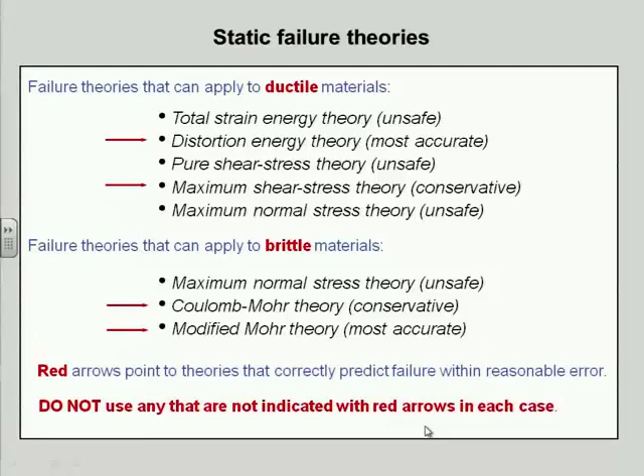Yes, Dan? So are brittle materials generally stronger in compression? Yes, that's what that's saying. In general, what Dan is asking is are brittle materials in general stronger in compression than in tension? And the answer is yes, most definitely.

In fact, cast iron, gray cast iron, which is probably the most commonly used of these kinds of materials, is 3 to 4 times stronger in compression than in tension. Concrete's another example, which has very poor tensile strength and very great compressive strength. I don't know what the ratio is.

Concrete is obviously not a metal, and it's a material that I'm not sure we would dare characterize as homogeneous and isotropic if it has rebar in it, which most applications do. Then it's going to have very different strengths in different directions, right? Concrete without the rebar would be approximately homogeneous and isotropic, I would think.

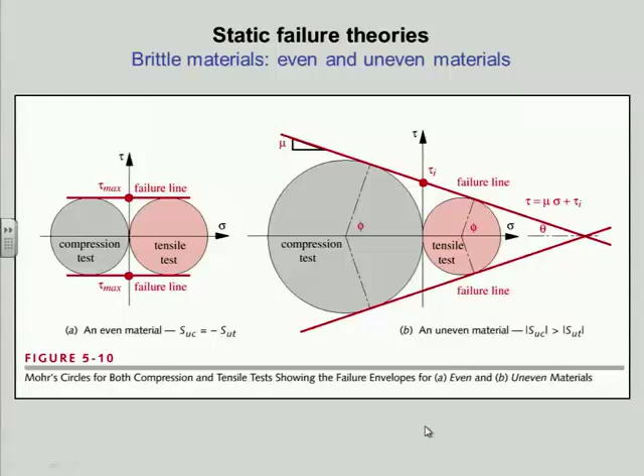So that's kind of getting off topic. Back to failure theories.

Wrought metals do obey Hooke's law; cast metals don't necessarily. So we have to fake it with an approximate value for Young's modulus, shown on this offset line, by going over 0.2% in strain and then drawing a line parallel to the starting slope, finding the intercept and declaring that the yield point—because there's no distinct yield point, unlike ductile materials that really give and show you that little hump as it starts to go into the plastic zone.

This doesn't really have much of a plastic zone. The plastic zone, such as it is between Y and F, is fracture. So brittle materials just suddenly break, as opposed to giving some warning, as with our specimen over here for the ductile steel tensile test. You can see the necking down that occurred as it went beyond the yield point and on the way to the fracture point. So you have visual warning that it's going, if you happen to be looking in the right place at the right time, and you can run, right?

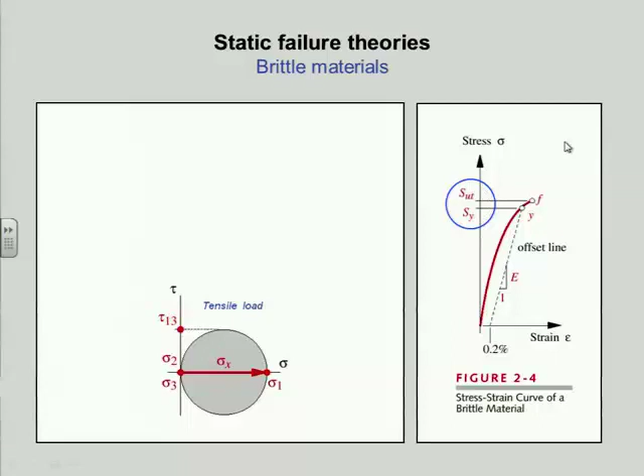So the tensile stress diagram, Mohr's circle for the tensile test in the brittle material, looks just like the one for the ductile material, but the material is behaving in a different way. Notice how close the ultimate tensile strength is to the yield strength, which isn't true of soft ductile steels—there's quite a difference between those two numbers, maybe 30,000 to 50,000 psi for a 1020 steel or something like that.

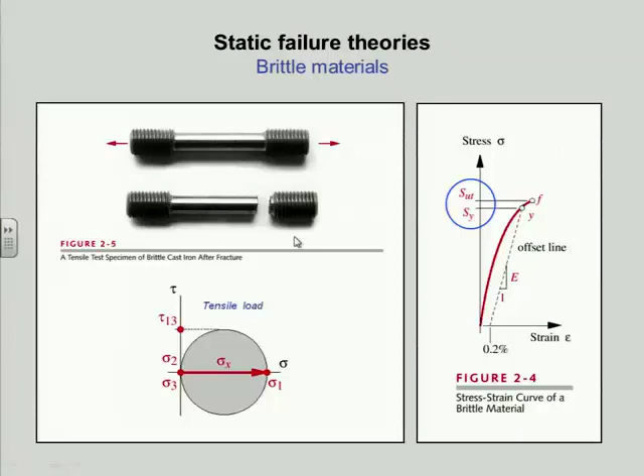There's the same picture of the specimen I just showed you on the board, with a before and after being pulled. That's cast iron—gray cast iron.

Another word on materials, which it's critical you understand well to be a design engineer, because you've got to make it out of something. There is cast iron, and there's cast iron. When you just see the term cast iron, that usually implies what's properly called gray cast iron—the stuff used for making machine bases and things like that. It's very weak in tension, about 20,000 psi tensile strength, with good compressive strength. Not generally used for machine parts that are loaded dynamically.

But I can go to a better grade of cast iron called cast ductile iron. That's made by a slightly different process, has different chemical composition, and has significant tensile strength up to about 100,000 psi. On the other hand, wrought steel can go as high as 300,000 psi in tensile strength with appropriate treatment. So there's still a big gap between wrought, really strong, and cast, not so strong.

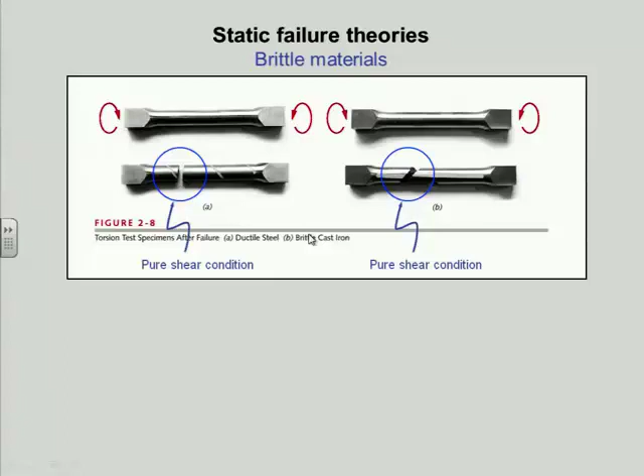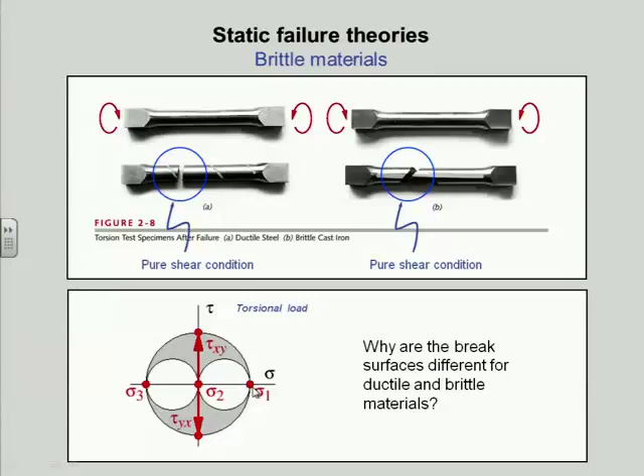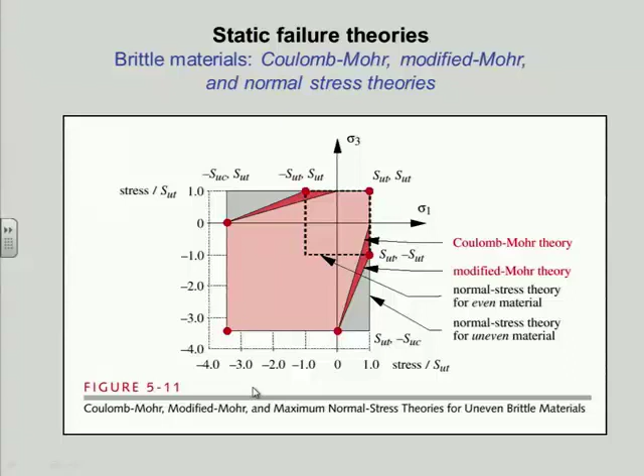The Coulomb-Mohr theory is next—it's the right top corner of the normal stress, but then a line drawn from the sigma 1 axis intercept down to this intercept, and it's the light pink. And the modified Mohr includes the darker pink. So why do we get these lines? Where do they come from?

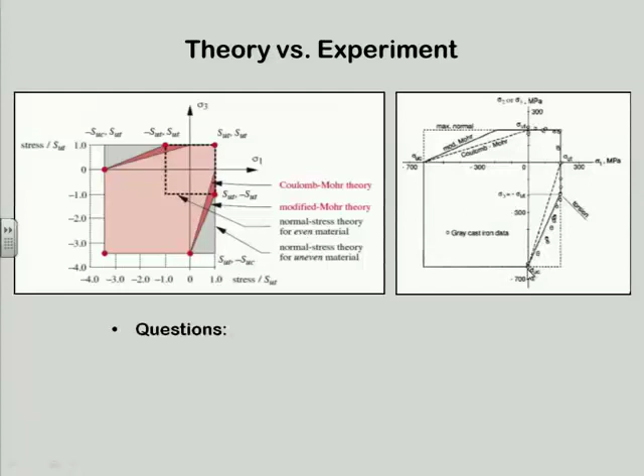So I think I've answered these questions already in my discussion. You tell me, based on what I just told you, which theory best fits the experimental data?

All together now. Got it. Conservative is Coulomb-Mohr, and lousy is normal stress theory. Don't use it, because some of your stuff is going to break, and you will think it doesn't.

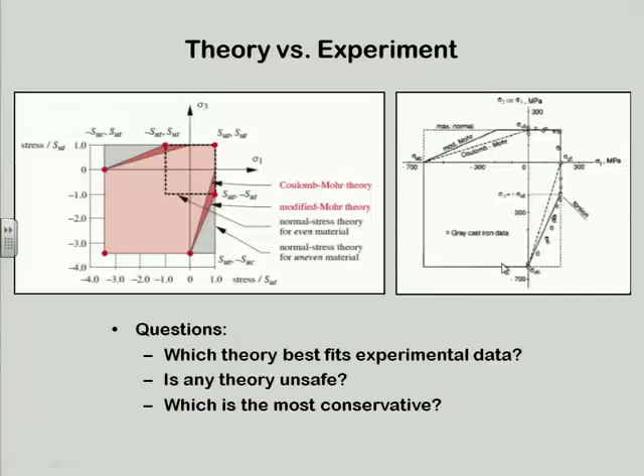Now, these, of course, are actual fractures, so we would not go that close to it. We would put in a safety factor, which gives us an envelope inside of that, of the same shape, by whatever comfort margin you want, factor of 2, 1.5, whatever you like. Same picture.

Notice this little line says torsion. Well, torsion will be equal positive and negative normal stresses, right? Because the Mohr's circle is centered at the origin. Shear plus and minus. I get equal plus and minus normal. So any torsion case is on a 45-degree line, either there or there, depending on directions.

So that's the modified Mohr boundary as labeled. And that just reinforces what the previous slide said.

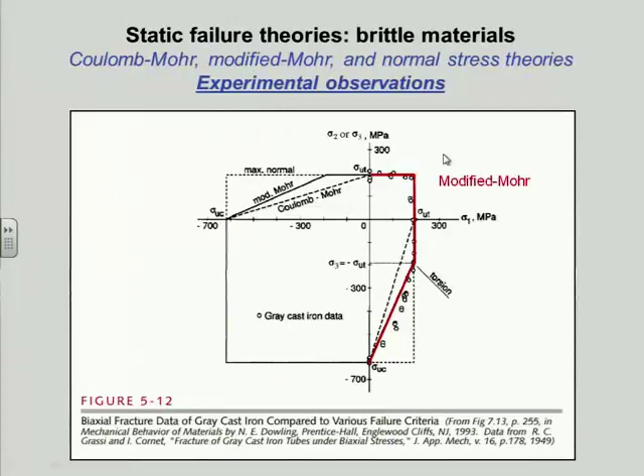They're always ordered algebraically, largest to smallest, and sigma 2 is going to be 0, and I'm only looking at sigma 1 and sigma 3, so I don't have to plot sigma 2 at all. So this is sufficient to satisfy all cases that I'll encounter.

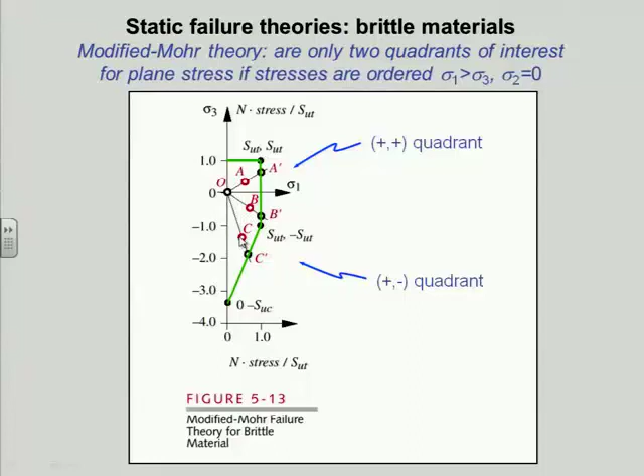If sigma 3's absolute value is larger than sigma 1, I break out of this line. I have to write the equations for these lines to get the safety factors. If I'm in zone 1, it's very simple: safety factor, often called N, is simply the ultimate tensile strength divided by my largest principal normal stress, sigma 1. This is quite simple to use, provided I get the right numbers in it.

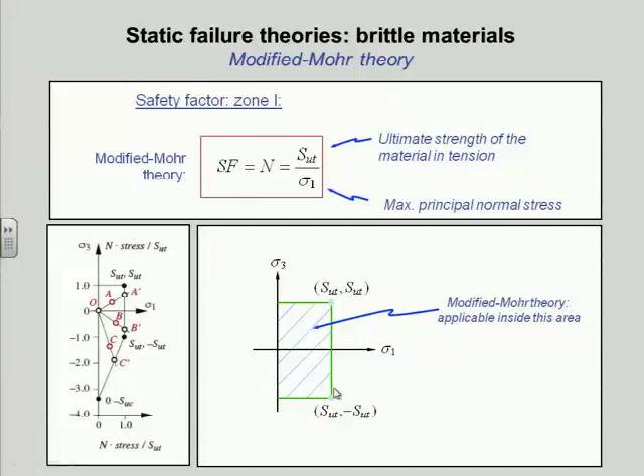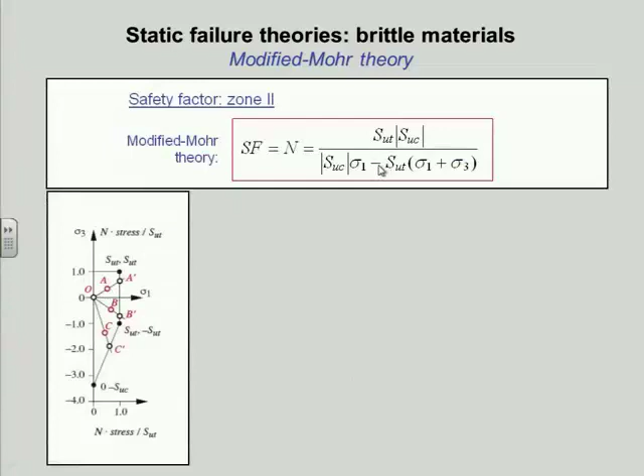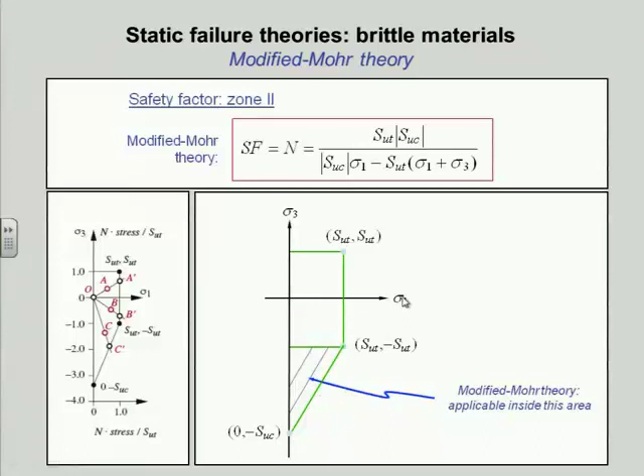That's my case 1, or zone 1, where my sigma 3's absolute value is not larger than my sigma 1. If I'm in zone 2, the south part of that piece, I have a more complicated formula. These come out of equations for those lines, and I derived those in the book so you can see where that equation comes from. So now I'm down at either B or C. Actually, I'm down at C in this case, below here, and I'm going to come out on this angle line.

So you need to understand the difference between these cases so you go after the right formula. It's based on the relative values of your sigma 1 and sigma 3, as well as their signs.

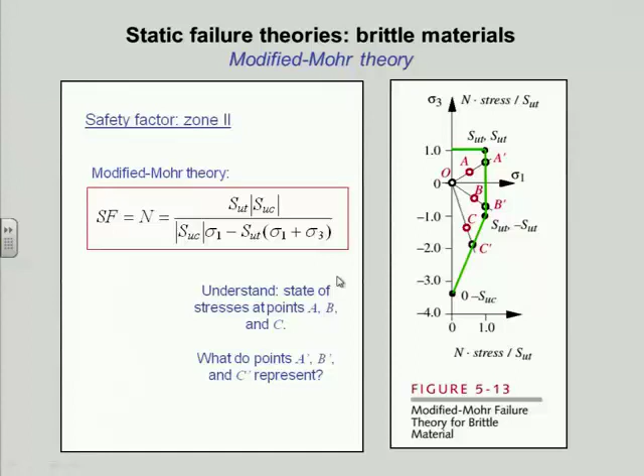Now, we have this very neat concept in the ductile theory called von Mises, or von Mises-Hencky, or Charlie's, or Harry's, or Sam's, whichever name you want to take, from all its inventors. That's a very nice way to wrap everything up with a ribbon. I've got some kind of crazy stress state, I can calculate the principal stresses for that. Now I can take the principals, put them through the meat grinder, and come up with a von Mises, and compare that directly to my tensile test specimen number and say whether I'm safe or not.

That's very convenient. So we didn't have, until recently, an analogous situation for the brittle case, until Norm Dowling of Virginia Tech, who has an excellent book on this topic from the materials side. He's a materials prof at Virginia Tech, and I referenced a lot of stuff from his book in here with permission. I think those pictures I was showing you are out of his book. He came up with this interesting concept.

He creates these factors, calling them C1, C2, and C3, which are functions of the stresses that you happen to have. This works now for 3D, because I've got all three of them in here. C1 involves sigma 1 and 2, C2 involves 2 and 3, and C3 involves 1 and 3. So you've got all your bases covered for a three-dimensional stress state. And you have the ultimate tensile and the ultimate compressive strength of your uneven material.

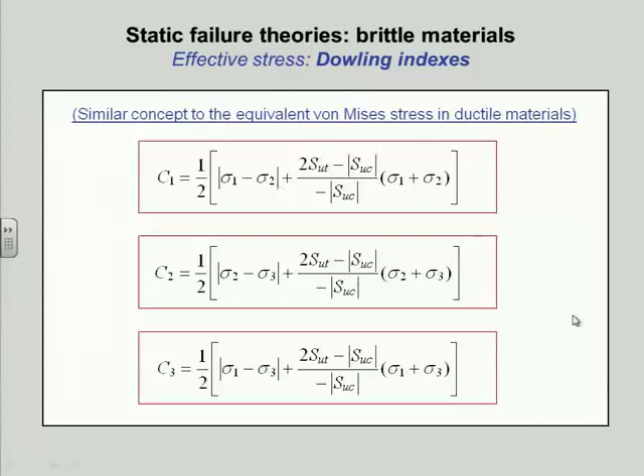So I can calculate those based on my particular set of principal stresses and my material strengths, and I can then apply those. I think he gave it this little symbol, the cedilla — does that sound right? A little squiggly over the letter. I'll call it a cedilla, I don't know any better. So sigma cedilla here is what I'm calling Dowling's effective stress. He doesn't call it that, but I do.

Dowling's effective stress, analogous to von Mises, with this funny symbol over it, is found by taking the largest value of all 6 of these parameters. You already have 3 of them, sigma 1, 2, and 3, that you calculated, and you use his equations to get the other 3, C1, C2, C3. The biggest one of those is this sigma squiggle, and I divide that into SUT, and I have a safety factor.

So this I can computerize. In my program, I can simply set these equations up, have it calculate all 6 of them, use a max function to find the largest one, grab that number, divide it by SUT, and there's my safety factor. Very convenient. If the max comes out less than 0, in other words everything's compressive, then you set it to 0.

I'm going to change topics completely, so I want to pause here and see if you have any questions on what I've just put forth. Yes? But if it's 0, then it won't be... what's infinity? Will the safety factor be infinite? Yeah. So if it's not compressive, then we don't worry.

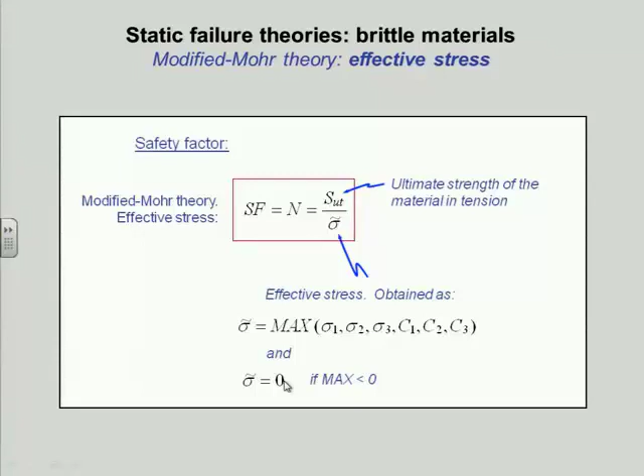There's several ways I can do that, and they're very effective. So tensile and shear are our enemy. They work together, depending on the material type, to destroy the part in some fashion. Any other questions on this?

Okay, new slide, literally. Very interesting topic called fracture mechanics. I'll set this up with some history, which I think is quite interesting.

First, the intro says that the modified Mohr theory we just talked about makes one very basic assumption, as does the distortion energy theory, and that is that the material has these properties: it's homogeneous, same throughout, and it's isotropic, just as strong in the x and the y and the z directions, no difference.

We also believe, with good evidence, that all materials contain microcracks, so tiny you can't see them with a microscope, that provide stress risers, stress concentrations, and those will raise local stresses. I've shown you that sharp cracks have a stress concentration that goes to infinity. The hole in the plate, if you take the ratio of the height of the ellipse to the width to zero, the thing zooms off to infinity.

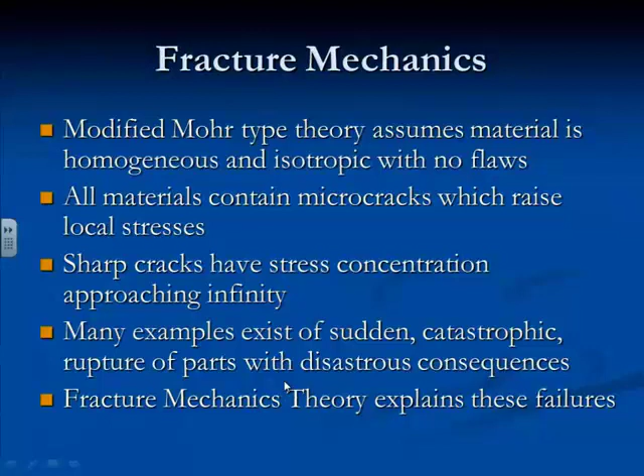We have many, many examples, I'll talk about a few of them, of sudden and catastrophic rupture of parts with obviously disastrous consequences. Fracture mechanics theory, which is only about 60 years old, just a pup by my lights, finally figured out what's happening here. So let me show you some examples of what was happening that was initially very mysterious.

Back in World War II, 1941-42, when Pearl Harbor happened and we got into the war in a big way, we'd already been sending Lend-Lease over to Britain because they were already under attack by the Germans for 2 years. And we needed ships. And of course, after '41, we needed tanks and guns and a whole bunch of other stuff. But initially, it was ships to ship materials over, and later troops.

So they started on a campaign called the Liberty Ship Campaign to build ships for our liberty. The U.S. government funded the bill. And so shipyards sprung up like mushrooms all over the United States, and they devised new ways to make ships so they could make them in a hurry.

Now, up until that time, all through the 30s, the way you made a ship of steel was you riveted the plates together. So you bunch of plates, you put holes in them, and you rivet them all together on the seams. And that's time-consuming and labor-intensive, because some person has to go there with the rivet gun and pound the rivets in, red hot, and all that stuff.

So somebody came up with a bright idea and said, welding's been around a while. We don't know a hell of a lot about it, but why don't we get rid of the rivets and weld the ships together? Great idea. So they started welding ships together, and they were making them like one a week in the same shipyard.

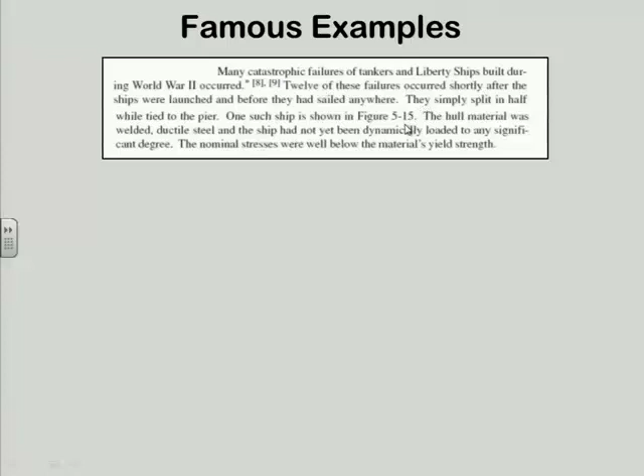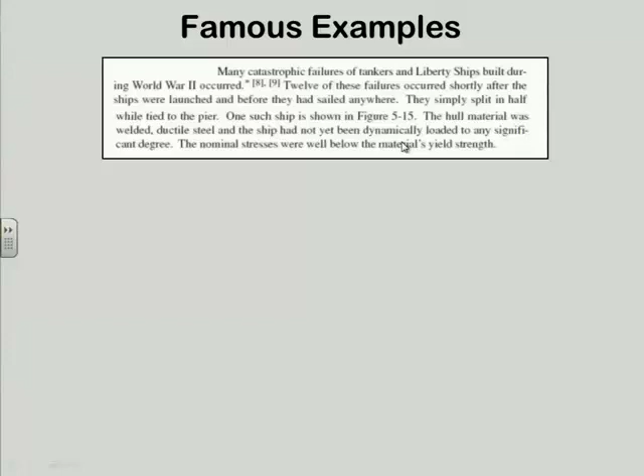Approximately 100 more split in 2 in the middle of the North Atlantic, full of crew and goods. Most did not sink because they were bulkheaded. So 1 ship left port and 2 arrived, 2 halves. They would somehow get them to Britain. If they didn't sink, they'd get them to some neutral or friendly country. They'd weld them back together again and send them out.

There's a picture. I think that's the SS Schenectady. It was built in Portland, Oregon, January 16, 1943.

What they would do is weld the hull up in a dry dock until they had it watertight and had a deck on it. Then they would launch it and tow it around to a pier where they would start putting the guts in it, the engines and all that stuff.

So this had been towed from the dry dock over to a wharf, and in 24 hours it broke in two, like that. Now that looks like a brittle fracture. It doesn't show any necking. It didn't get longer before it broke. It just broke, as if it were brittle steel, but it wasn't.

This caught a lot of people's attention, as you might imagine. The U.S. government created this Ship Structures Committee, which still exists to this day. I've talked to them, I got that picture from them. Once the government creates a committee, it never goes away. Here we are in 2011, and they're still in business in Washington. Don't ask me what they're doing now, because they've solved this problem.

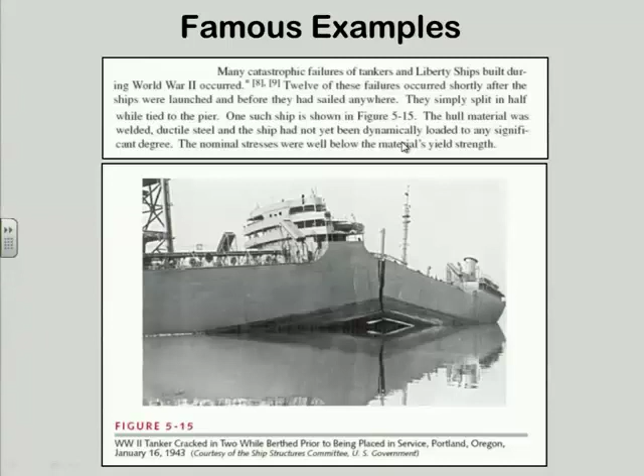As a result of the government's huge effort setting researchers all around the U.S. university system working on this problem, it took until the war was over to figure it out. It was something like the late 40s when the theory was finally put together. And that's what I'm going to discuss with you today.

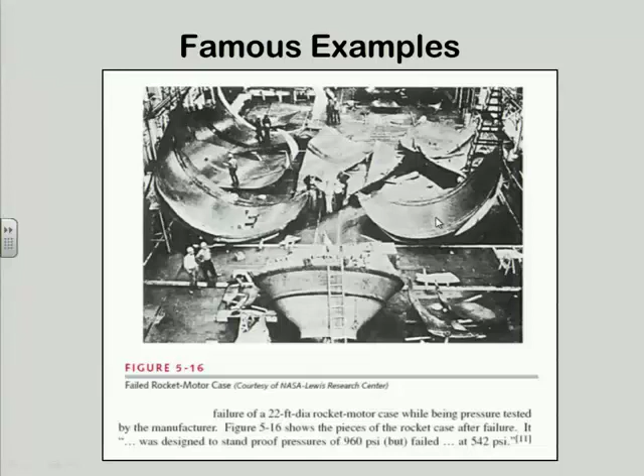Now look at that picture carefully. You will see people in it, to give you an idea of scale. The thing's huge. And it's like an egg cracked, just like that.

Another example. My father told me this story because he was alive and living in Boston in 1919. He told me the story, and then I ran into it again in 1994. My clock radio was set to NPR News, as probably many of yours are too, so I wake to the news every morning. On the morning of January 21, 1994, 75 years to the day after the Great Molasses Flood in Boston,

I heard the following story. They interviewed a 91-year-old Boston man who was 16 years old in 1919 and lived somewhere in the neighborhood, the North End. He recalled a sudden popping sound like machine gun fire, followed quickly by a loud explosion. The machine gun sound was quite likely the sound of the crack propagating across the tank wall at up to a mile per second, which is what that rocket case did and what the tanker did - I failed to mention that earlier. And the loud explosion was probably that of the molasses pressure bursting and disintegrating the tank, large pieces of which landed on and destroyed Mrs. Murphy's boarding house hundreds of yards away. I actually went to the Boston Public Library years ago and looked up the newspapers for that day and the week thereafter and read a whole bunch of stories, because it was all over - Boston had 10 newspapers at the time, and they were all on that story. These are my words, my recollection of what the guy on the radio said.

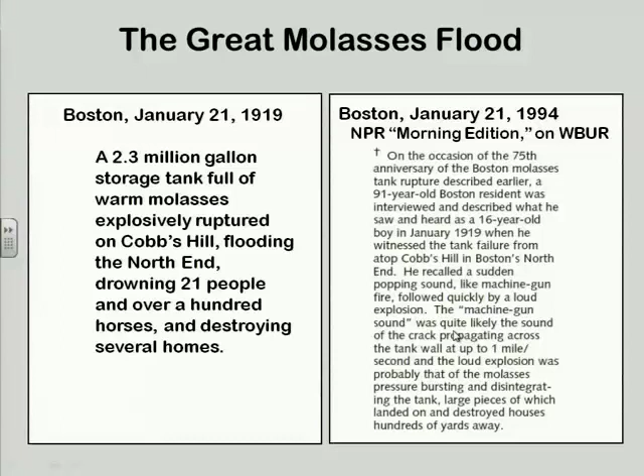So what happens in these fracture mechanics failures is really dramatic. It's a crack growth problem. So you have to have a crack - you start with a crack, but everything has cracks, so there's always the seed there. You put some stresses on it of some sort, and the crack grows, and slowly it grows, and slowly it grows. Then it gets to a certain length such that the material left is not enough to hang on anymore, and it crosses what's called the fracture toughness threshold. And the thing unzips at a mile per second through the metal and just comes apart.

So, getting into the theory a little bit here, I'm not going to go into this in great detail. You could do a whole course on fracture mechanics, and there is a higher level course in materials here that deals with this, if you're interested in it.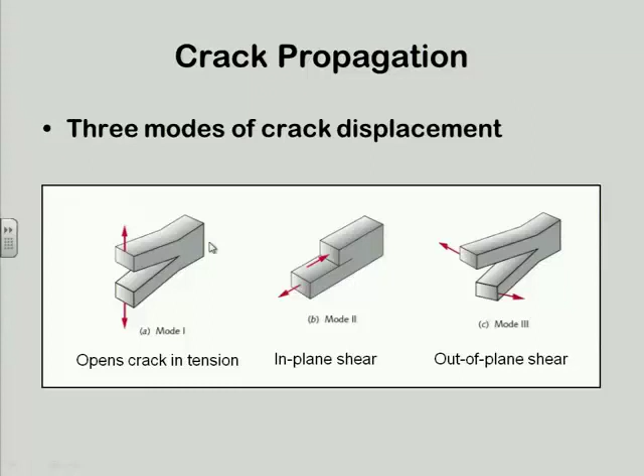They talk about 3 modes, 1, 2, and 3, depending on how you're loading the parts. Mode 1 is pure tensile loading, here's the crack, and something's causing the crack to open and close. Number 2 is shear, trying to shear the crack, and number 3 is sideways pulling on the crack. I'm only going to talk about mode 1, because we can get the idea from that.

Back to the other slide. These equations allow you to calculate the magnitude of sigma xy and tau xy around the tip of the crack, with theta being the angle as you go around the crack. K is the stress intensity factor, defined as your nominal stress, which in this case would just be F over A. They don't even bother to subtract out the crack, it's just F over A for the whole section. It wouldn't make a big difference because the crack is tiny. And that's your sigma nominal.

And then it's times the square root of pi A, and A is a dimension over here, it's the half dimension of the crack. Beta is an adjustment factor which varies depending on the geometry. So if you go to a fracture mechanics book, which this does not purport to be in any sense of the word, it's just a brief introduction, you will find chart after chart of the beta factors for this, that, and the other, much like your stress concentration factors in the back of this book.

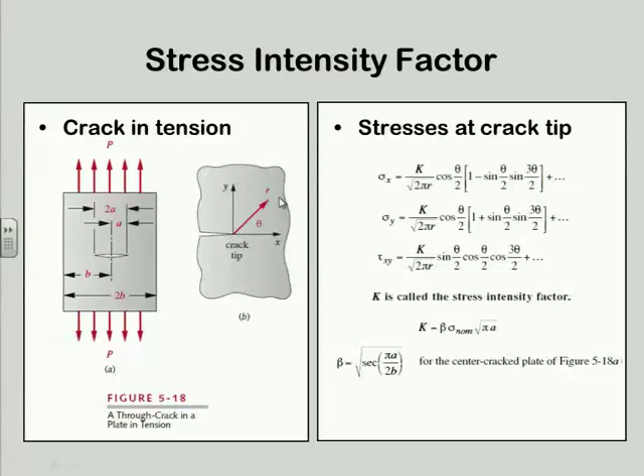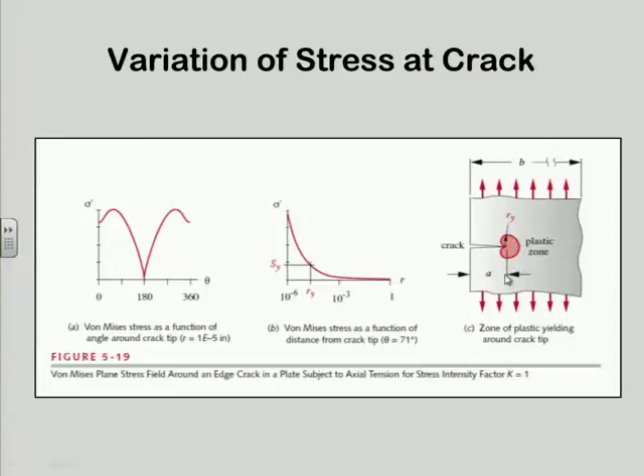So as I move away from the crack, of course, the stress gets smaller, right, because it's in the denominator. So this plots sigma prime von Mises at the 71-degree angle, which is the worst case, on a logarithmic plot from a distance, a radius of 10 to the minus 6 meters or millimeters or whatever units you're working in, through 10 to the minus 3 to 1. So 1 radius away, it's essentially gone to 0, and that's what gives you this plastic zone close to the tip. Does that make sense to you? Have a picture of what that's doing?

Okay, so now we can calculate by some means this K value, this fracture stress intensity factor. But we have to have a strength type factor to compare it to, so we need another parameter. It's given the name K sub C. That's actually, I've shorthanded it a little bit, I have some explanation up here.

It's called the fracture toughness, K sub C. That footnote in the book says there's really 3 of these, one for each loading case: K1C, K2C, and K3C. I'm only looking at K1, so I dropped the 1. So this is really K1C, but for simplicity, I called it just KC.

So the deal is, when the value of K in these funny units, megapascals times meters to the 1/2 power, reaches KC, it unzips, and it's gone in a second, comes apart. So my safety factor wants to be some comfort zone away from that. Don't let my K get anywhere near this number, right?

Now, several of you have already told me that you do fly. Commercial, I would assume. Anybody a pilot? Private pilot? You are?

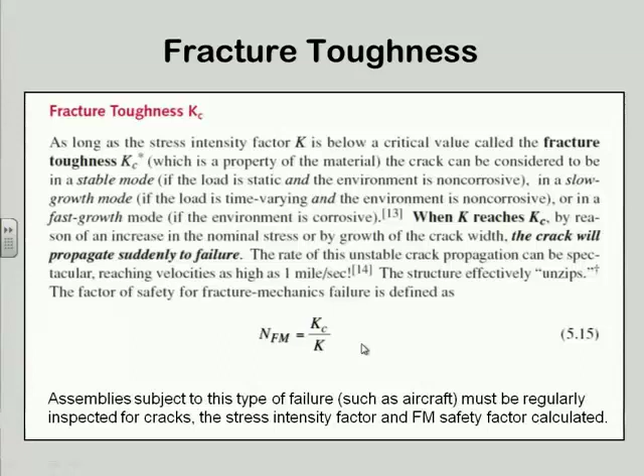So the FAA requires that every N hours, maybe 1,000, there's some particular bogey of flight time, the plane has to be brought into the shop, and certified aircraft mechanics inspect it, X-ray, crawl into the wings, look for cracks, measure the cracks. They have formulas to apply: you take the crack length, calculate these numbers, and see how close you are to failure. If you get within the bad zone, you're required to take that airplane out of service and either replace the part or do some kind of repair.

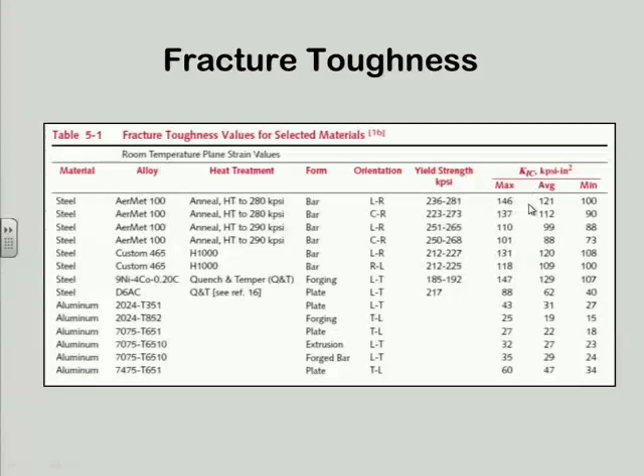This is just a table of fracture toughness values, K sub 1C, I was calling it K sub C on the previous slide, for various materials, and there's much, much more of that information available in the literature. By God, I'm going to finish on time today. This is my last slide, I think.

That picture's in your book, and the part's in my hand. I'm going to pass this around. If time doesn't permit, you can inspect it on the way out. It's worth a look. This is a trailer hitch. The ball goes there, the hole for the ball. There was other stuff here that was cut off. This would be on some kind of bracket that gets bolted or fastened to the back end of the car.

The story behind this is that I taught this course one year, many years ago, right here, and it was springtime, and the student went back home to Washington State, Oregon, someplace out there, for the summer to work in his father's business, and his father made trailer hitches. He had like a welding shop, he was sort of a blacksmith, and one of his products was to make trailer hitches. The next September, the student shows up in my office with this in his hand. He says, my father was making a trailer hitch, and what he does is take a piece of wrought steel, run through a mill to make a rectangular thing straight, heats it up red hot with a torch, puts it in a vise, puts a pipe in the hole and bends it 90 degrees when it's red hot.

This one broke when he bent it. You can see it pretty well in the photograph, or over here. This surface looks like a brittle failure, not a ductile failure. This is ductile 1020 steel, and it was red hot, which makes it even more ductile, out in the plastic zone. And it cracked instantly in a brittle-like failure. When you handle it, it's sharp on the edges - don't cut yourself. Look at the break surface, and you'll see a little smiley there, which is a crack. That piece of steel happened to have a crack in it. When he grabbed that, put that pipe in the hole, and bent it, he exceeded the fracture toughness threshold, and bing, it came apart.